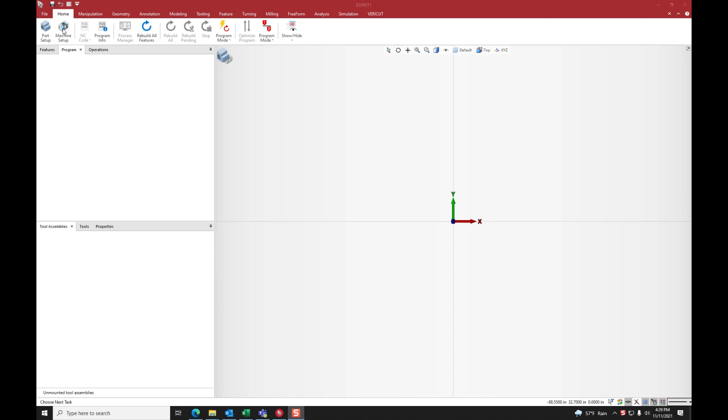We're going to choose DMG MORI NT6600. This is our machine environment.

Open that. Hit F4, and F4 will put you in lathe view. You'll see that right here, ZX view - that's your lathe view, lathe mode view. And you have other options here. You can hide or show different components, and you can make it more transparent or not.

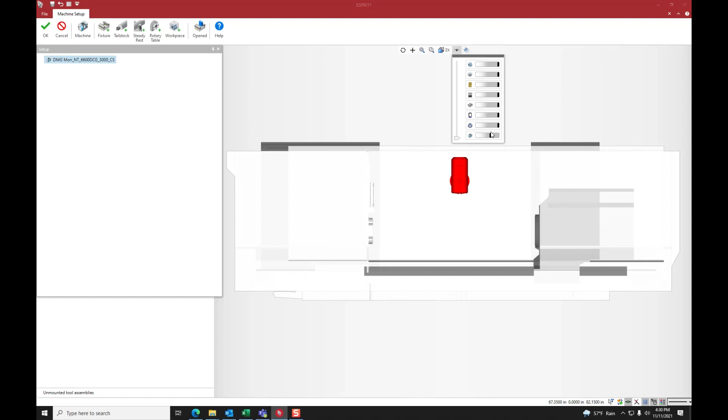So next thing we do is we need to add a chuck, and that is called a fixture. So we go to fixture, under ESPRIT data fixture, ESPRIT TNG data fixtures. I'm gonna just set up USNR proven fixtures or made fixtures that we use. And if you want to find something that's not, we'll have samples or direct manufacturer fixtures that you can play with or import if needed.

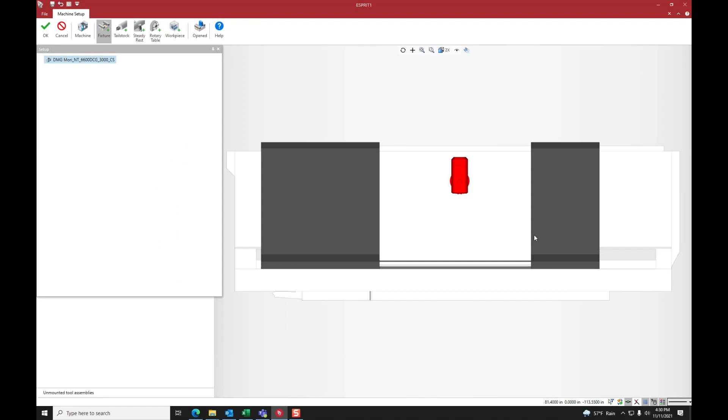So we'll go to USNR chuck, and this is our standard B15 Kitagawa chuck. You can see it here. Hit open, and you have a mounting. It'll default to FA1, but just in case, this is where your mounting points are. So all this should stay 0.

And if you go here, you'll see the chuck snapped to the right spot. Hit OK. Now we got to add some jaws.

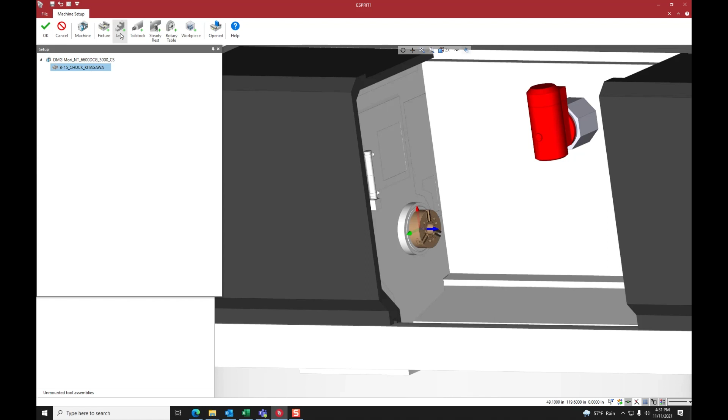So we'll click on jaws and make sure you are highlighting the chuck. If you highlight the machine, it won't show up. So highlight your chuck, go back up, and if it's hard jaws or soft jaws, go there.

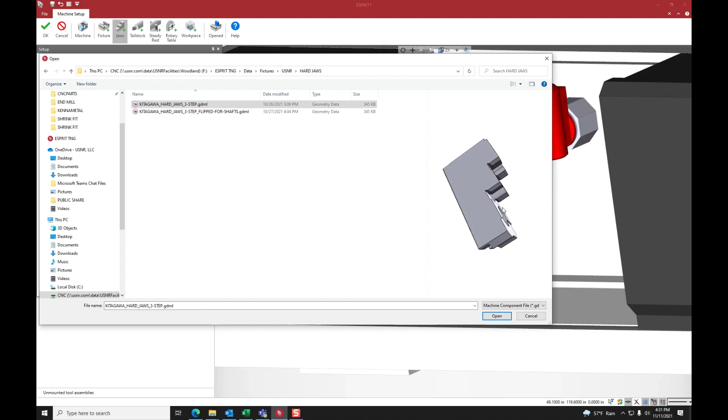So 3-step flipped for shafts. So this is going to be like this, and you have your shaft down here. If you're using it to do bigger diameters, then it'll be oriented like this to use either this step or this step. So let's say we're doing a shaft.

We'll hit open. That'll load your jaws. You can do open, closed. It's a little goofy sometimes, so what you do is just go close position will be -1 inch.

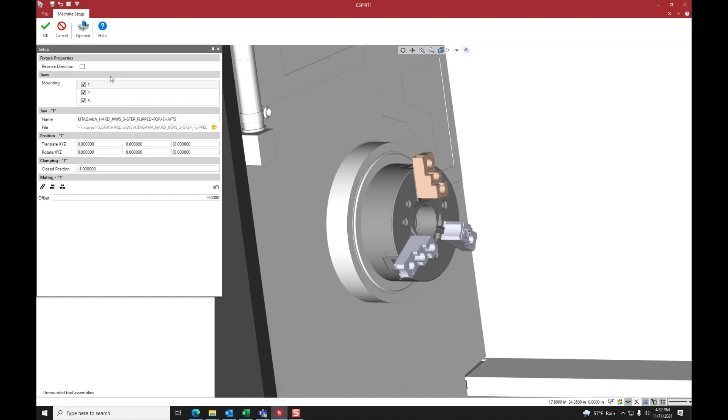And we're gonna look at just this one now. These are kind of take a look. You have to close out of this to refresh. So we'll just look at the functionality of this because we only work with one jaw at a time. Hit OK.

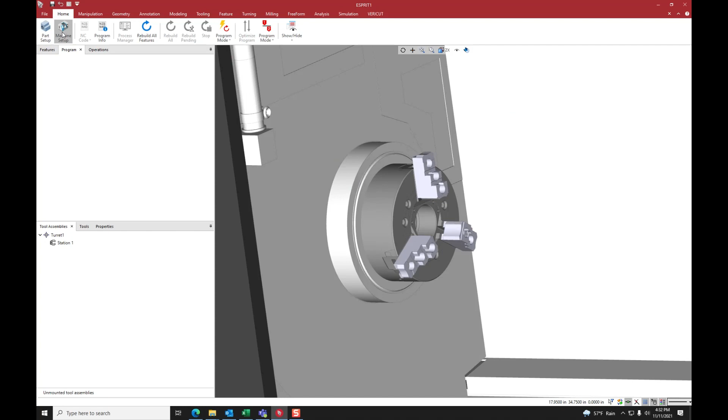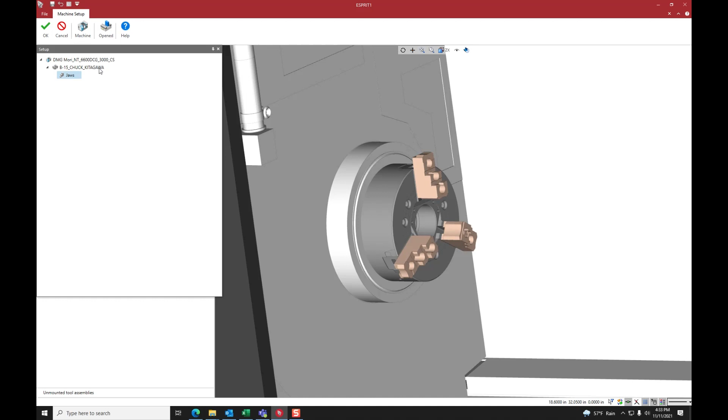And then go to jaws, it should... right here. So there's our open close position. I think this is a bug at this time, but that's a workaround I figured out.

So if you go here, add a second chuck, you can just add both chucks one after another. It'll automatically bounce it to FA2, which is your second spindle. You can see it right there.

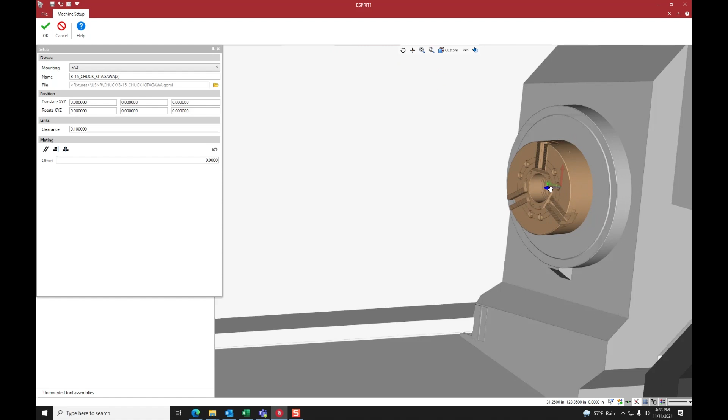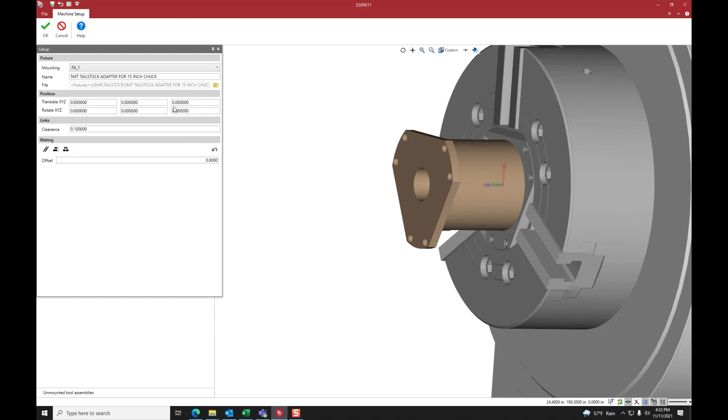Hit OK, and if we're gonna put a tailstock, make sure you're highlighted on that. Go to tailstock. This is the adapter plate. Put that in there. So the adapter plate is 5 inches long, so we'll go -5 here to translate that.

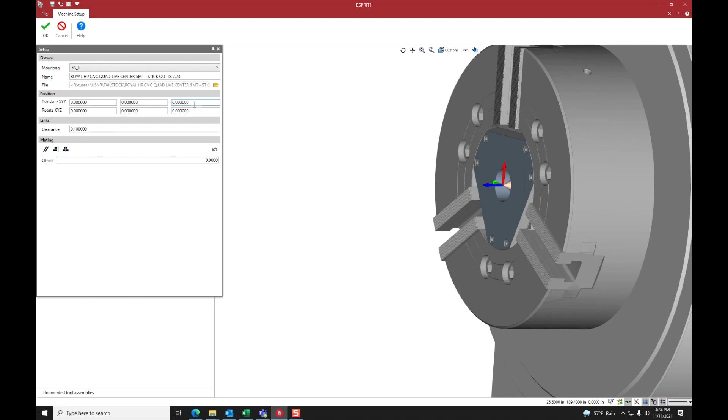And then to the chuck, we'll have the tailstock, and choose this one. And it says stick out of 7.23. You gotta remember that, because you're gonna input right here 7.23, and that should mount that there. So now you have tailstock and you have that, and that's it.